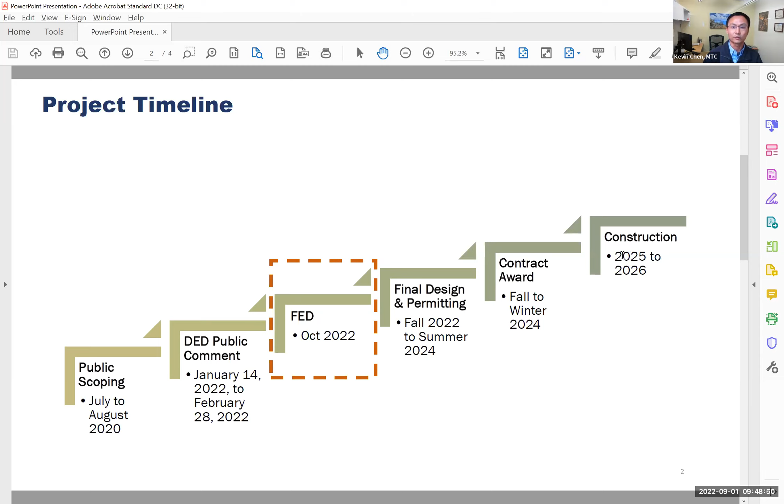Completion of the environmental document is going to be a critical milestone because it allows us to be a lot more competitive for a number of state and federal grants that we are going to be competing for. After the environmental document, hopefully we have some funding for us to proceed with the design work later this year. The plan is that we would finish design by 2024, start construction in 2025, and then finish the project in 2026. So that's the current project timeline.

Another area we've been focusing on a lot in recent months is working in collaboration with a lot of the resource agencies on opportunities we can incorporate as part of the interim project that can help provide environmental benefits and ecology enhancements. It's very time sensitive for us to provide these improvements and not just wait for the long-term project. That's why we're having this discussion right now, and the intent is to incorporate this into the interim project so we can start getting some environmental benefits as soon as possible.

One of these areas, as we've talked about before, is the Tolay Creek Bridge. As it exists today, it's a very narrow bridge, and we've heard from the environmental communities the importance of replacing the existing bridge with a much wider or longer bridge that can provide the necessary channel width to help enable a significant amount of planned restoration effort as part of the Sonoma Creek Baylands strategy.

The way you can think of it is replacement of the bridge is part of the equation, and the environmental community and Baylands group doing the restoration is the other part. We need both things to materialize the environmental benefits. So the ask for us is to incorporate the Tolay Creek Bridge replacement as part of the interim project.

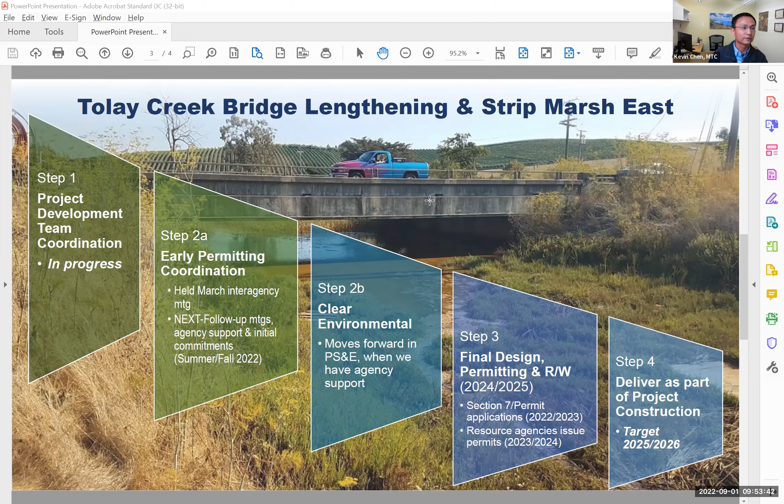We've heard many times, and our earlier speakers have spoken to it, the importance of providing bus transit on this corridor, so that's going to be implemented as part of the interim project.

Tolling is still going to be a very critical piece, as with the tolling authority it provides us the opportunity to finance against future toll funds. Rebecca Long from MTC is going to provide an update on the tolling discussion.

I'd also like to mention that back in May, we submitted a grant to the US DOT for $100 million on this project.

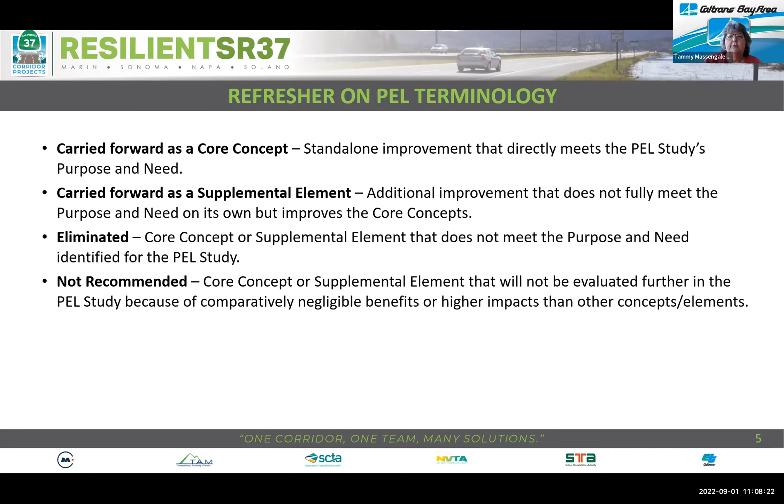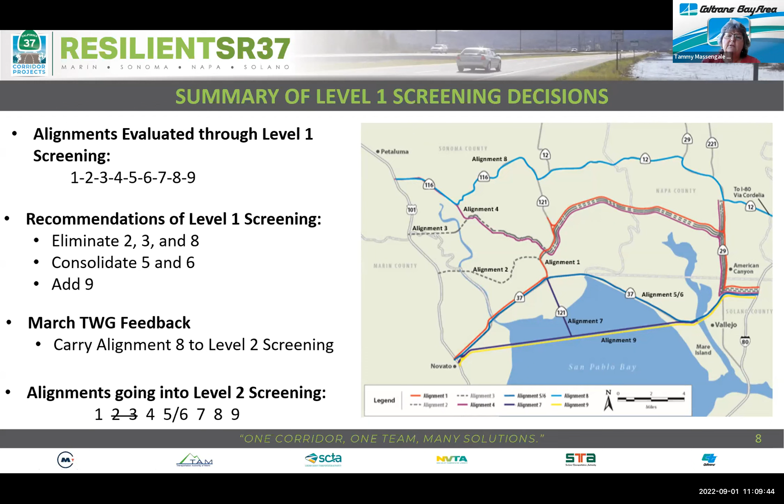Based on feedback from the technical working groups, we were asked to carry alignment 8 through and look at it further because it was completely out of the bay. So we listened to our technical working group and kept 8 in. I want to remind everybody this was purpose and need, and we felt like 8 didn't meet the purpose and need, but we wanted to do a full analysis of that particular alignment.

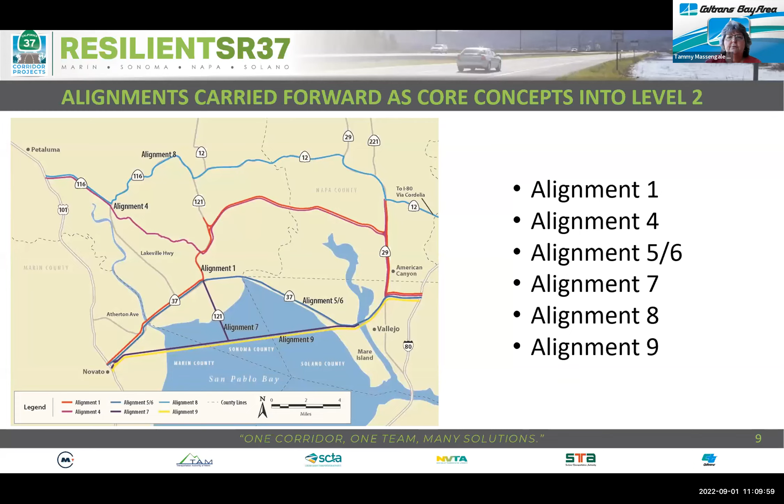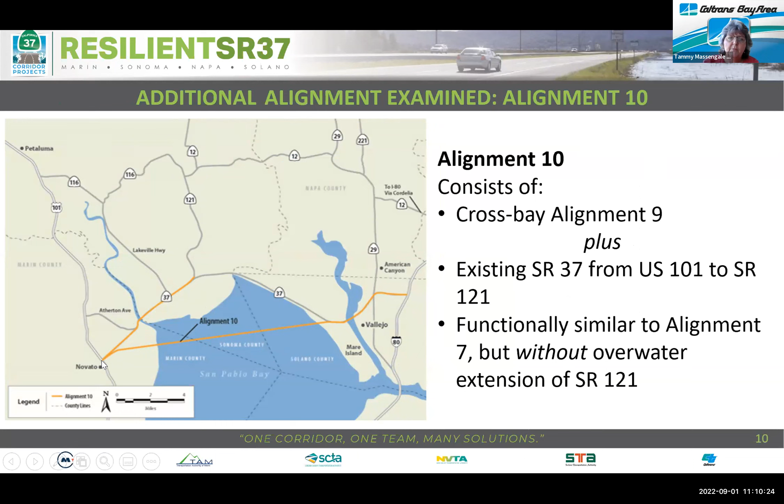So we moved into level 2. You can see here the alignments we were looking at. As we talked with our stakeholders, there was concern that alignment 9, which went straight across, would be cutting off the Sonoma Valley and folks from Napa who come over to the west. So we came up with alignment 10, which follows the same alignment as 9, but keeps this portion of the existing 37 corridor from Novato to 121. It's similar to 7, but doesn't have the extension that would create an interchange over the water.

In level 2, we had a lot of discussion about vehicle miles traveled, the new traffic analysis the department uses for CEQA - not just the department, the entire state of California. We came up with three alternatives that did not have an impact on VMT: along the existing corridor with 5, 6, 8, and 9. I know that seems difficult with 8 to understand why, and I don't have time to go into all the technical analysis. Please trust me on this, but it has to do with the calculator that's used, and it's just the pure addition of lane miles.

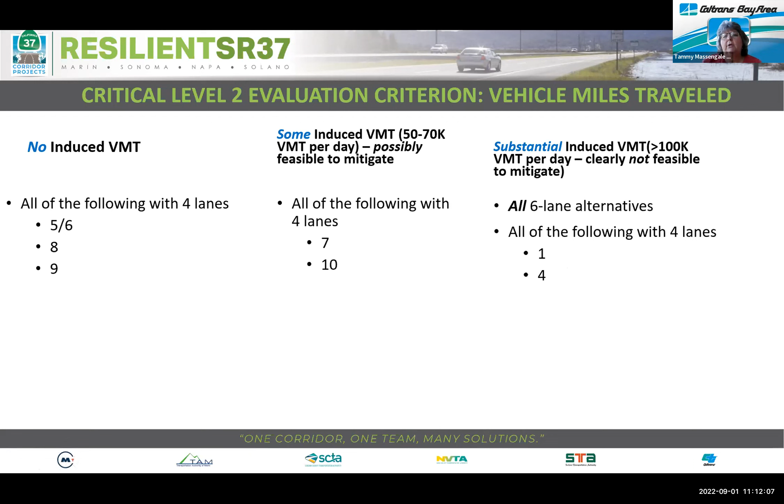There would be some increase in VMT for alignment 7 and 10, but we felt like those impacts could be mitigated to zero, which would be less than significant. Then we had two alignments, 1 and 4, that had a substantial increase in VMT which we probably couldn't mitigate. And we were looking at 6-lane alternatives, and they were a no-go when it came to VMT also, because it was too much.

So coming out of level 2, we recommended not moving forward with the 6-lane options, alternatives 1 and 4, and alternative 7. The reason we chose to remove alignment 7 was because of the interchange that would have to be built over the water - it just really wasn't feasible. Alternative 10 provided that access to the Sonoma Valley.

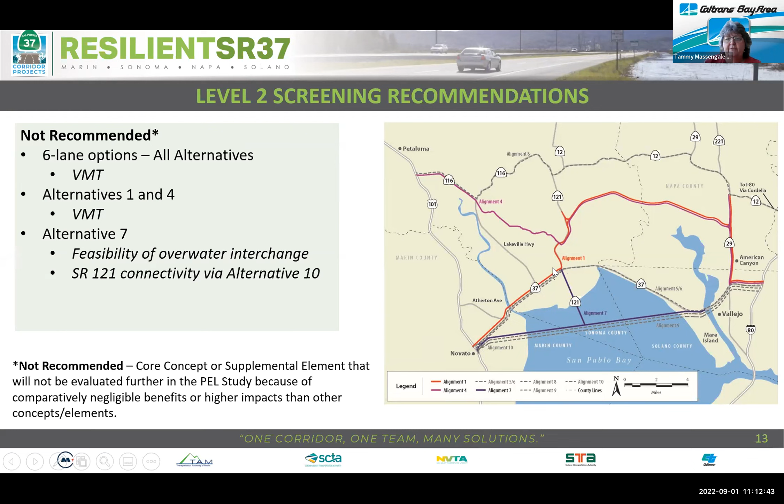As part of our second level, we also made the decision that we would only be moving forward with a causeway for all of our alternatives except for 8, which would have partial small amounts of causeway, but most of it would be just regular roadway on the ground. So we eliminated the 6-lane option, if you will, and we're just keeping alternative 5.

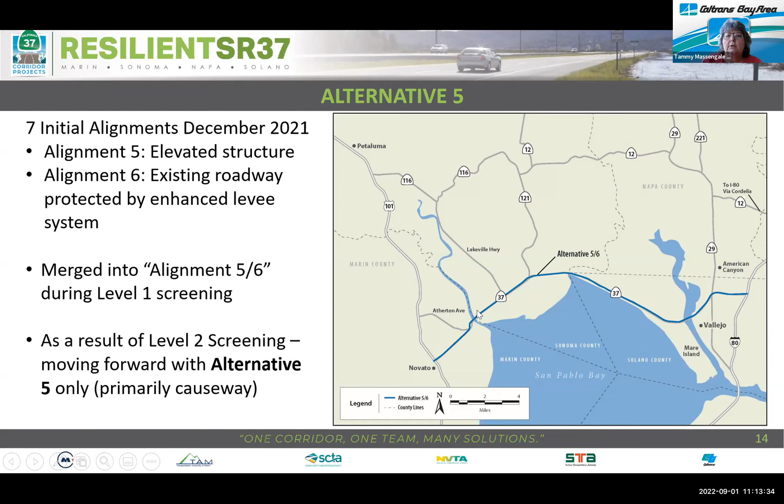Let me go back real quick. I wanted to address this primarily causeway. Some of the proposed ultimate will not be on causeway, and that's because it will be at grade. There wouldn't be any large earthen embankments or anything like that.

Moving into level 3, we went forward with alternatives 5, which is on the existing corridor, 8, which is up here on the far northern, and then 9 and 10, which were across the bay. We also looked at other modal options, including bike and pedestrian, rail, and a shoulder running lane for express buses and/or carpools. For rail, we've been working closely with SMART and their staff, and we are moving forward that we don't want to do anything that precludes rail from their future build out.

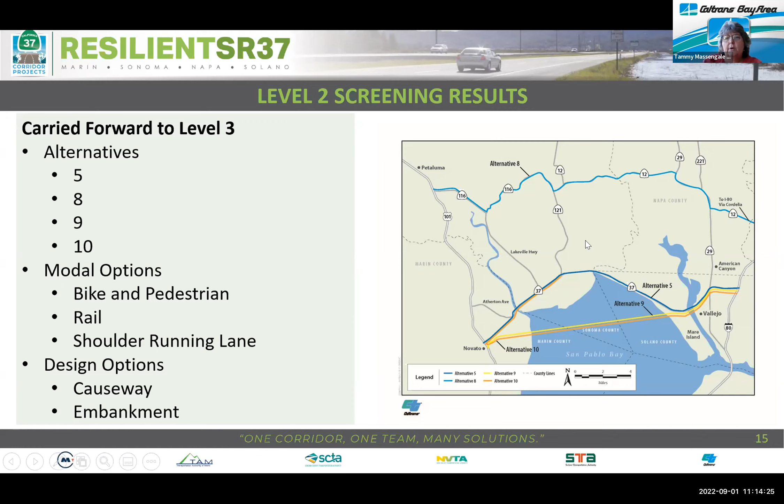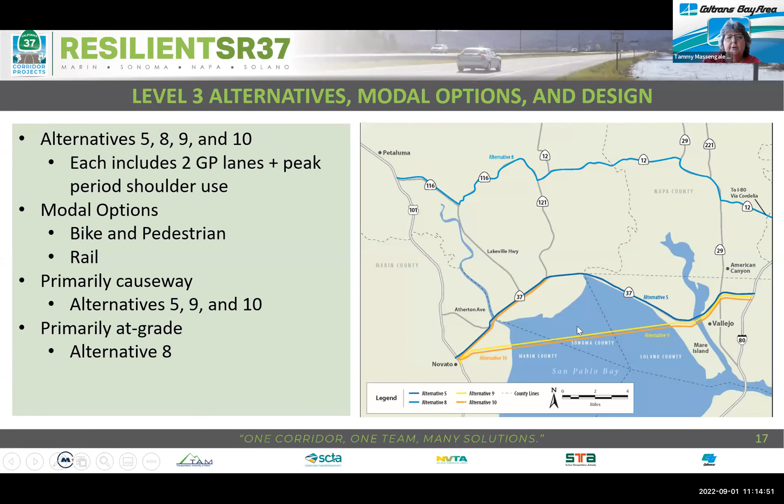The design options were the causeway and the embankments. Coming out of level 3, we had these alternatives that were going to have 2 general purpose lanes and that peak period shoulder lane. They would have bike and pedestrian and would be able to have rail run adjacent if that's the choice that SMART makes. And I talked about that it would be primarily causeway and at grade up on alternative 8.

When we went through and did the analysis for level 3, we used the Plan Bay Area Model 2050. We had several other criteria that we used, but we don't have time today, so I'm just going to highlight some of them that were differentiating factors.

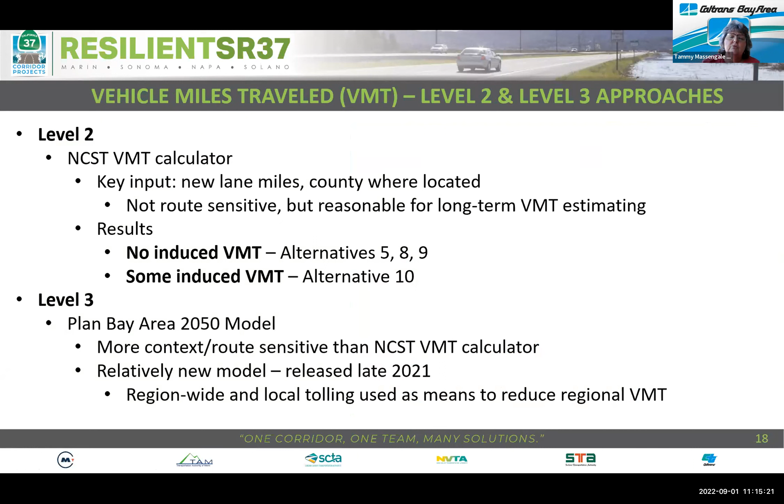The model we used from Plan Bay Area 2050 is new, it hadn't really been used for this. There's not going to be any real changes to VMT compared to level 2 because of the way the 2050 model has been developed. So what we really wanted to focus on here was the origin and destination pairs, because that's what we build our roads for, the traveling public.

As you all know, this is a very dispersed corridor. People come from all over to go places. So we looked at the top 4 OD pairs, origin destination pairs, and found that the best place would be to look at the difference in mileage, travel time, and what would happen in the peak flow periods. What we found was that alternative 8 had the most increased mileage for those 4 OD pairs.

Interestingly enough, if you were going from Vallejo over to Novato or over to San Rafael, the best route would be for people to go down and use the Richmond-San Rafael Bridge. So those folks going to Southern Marin would not be using the new highway.

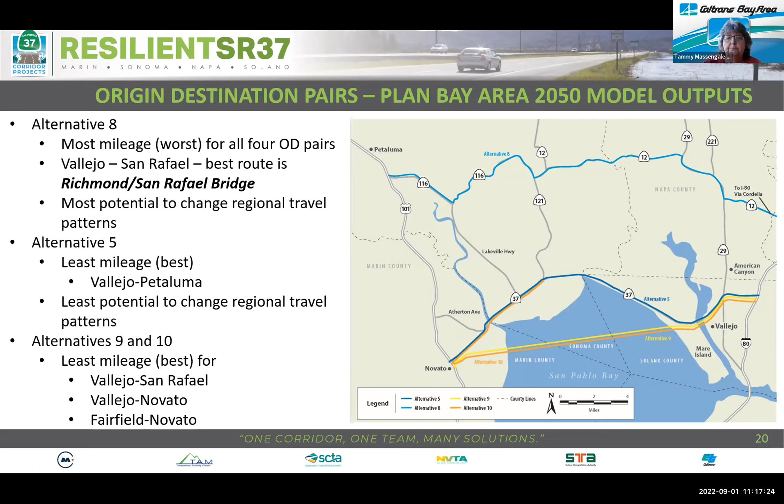What we found is that alternative 8 does not serve any of those populations. Alternative 5 would serve all of them. Alternative 9 would serve 2 of them. And alternative 10 would serve all but 1. When I say serve them, it's the existing way those EPCs get from where they live to other points along the corridor.

All of our other methodology was based on acreage impacts. We're still looking at this at a fairly high level, and we wanted to make it equitable across all the alternatives. What we found is that alternative 8 had more at-grade sections and is primarily located in uplands. Alternatives 5, 9, and 10 would be on causeways or bridges for the vast majority of their length.

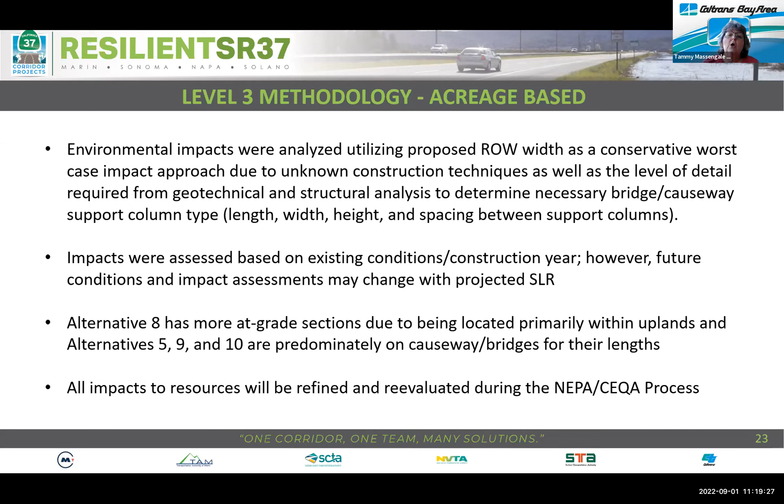It's important to note that these impacts we've identified during the PEL will be evaluated further in NEPA and CEQA. I picked out a few that I thought would be interesting and informative, and that really helped us make our decision for the recommendation.

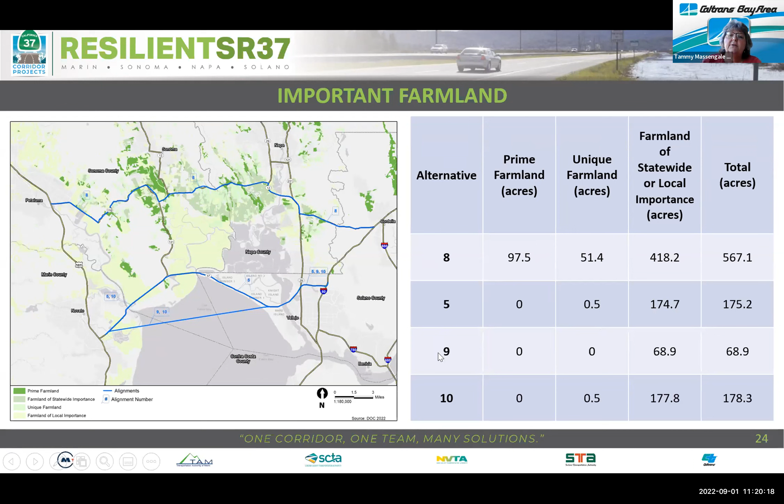Farmland is divided into different areas: prime farmland, which is very difficult if not impossible to mitigate; unique farmlands, which would include viticulture; and farmlands of statewide or local importance. Alternative 8 has significant impacts on all of those different types of farmlands.

Alternative 5 has some impacts, 9 has the least since it's going across the bay, and 10 has some. We also looked at wetlands, all types, not just one particular kind. Alternative 8 had the least impact on wetlands, alternative 5 was next greatest, then alternative 9, and then alternative 10. We wanted to see which one was going to have the worst or the best.

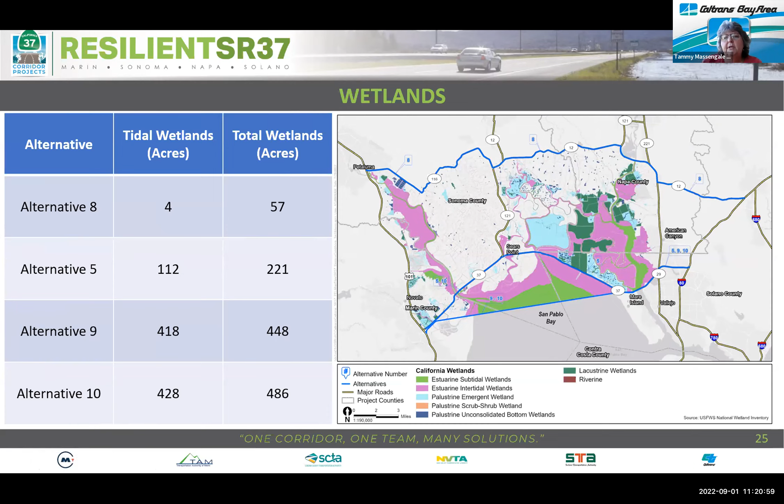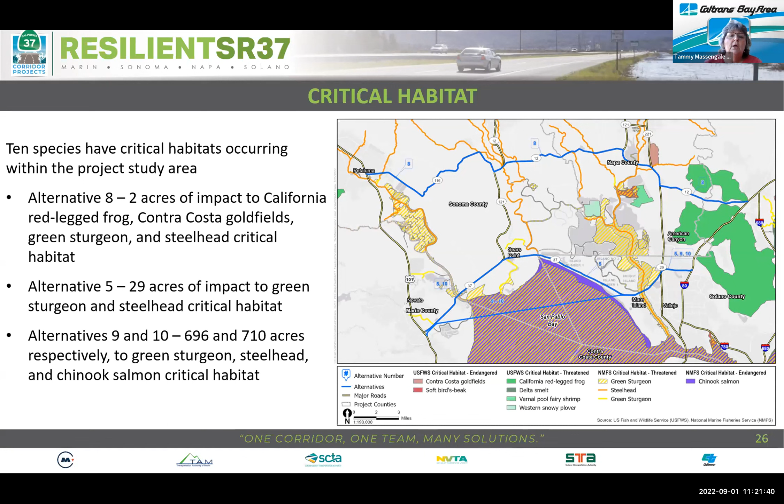You can see by looking at all these resources that it's really a balancing act. We also looked at critical habitat, where species are listed, either living there or migrating to and from. For alternative 8, there were 2 acres of impact to the red-legged frog, goldfields, green sturgeon, and steelhead critical habitat. Alternative 5 had 29 acres of impact to green sturgeon and steelhead critical habitat. Alternatives 9 and 10 had substantial impacts, 696 and 710 acres, to sturgeon, steelhead, and Chinook salmon.

Most of it is the impacts for regional travel patterns and the impacts to the equity priority communities. It's also very susceptible to wildfire closures, and there's a huge impact to prime farmland and terrestrial species. There would be noise abatement required because there are a lot of residences close to the highway, and it would have the most adverse effect on visual quality.

We did look at the purpose and need also, and it is still recommended not to move forward with alternative 8.

Alternative 5, the recommendation was to move it forward as a core element. There were a variety of reasons, but it really minimizes land conversion, maintains the existing travel patterns, and considers the resources that will be impacted. I listed some of those: the wetlands, the fish species. Those areas have already been impacted by the development that has taken place along the corridor.

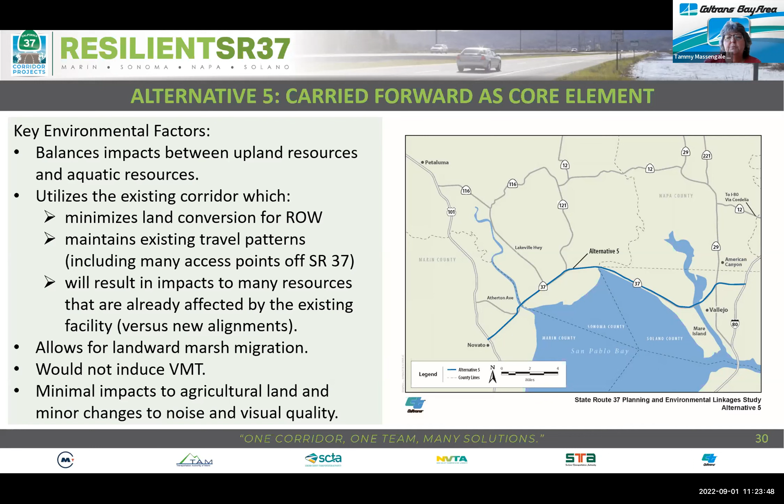So they wouldn't be as significant impacts as some of the other ones. This would also allow for landward marsh migration, which we've heard from our stakeholders is very important. It would not induce VMT, and there would be minimal ag land impacts. Most importantly, it really is a balancing act here between the impacts to both upland species and resources and aquatic species and resources. And it met our purpose and need.

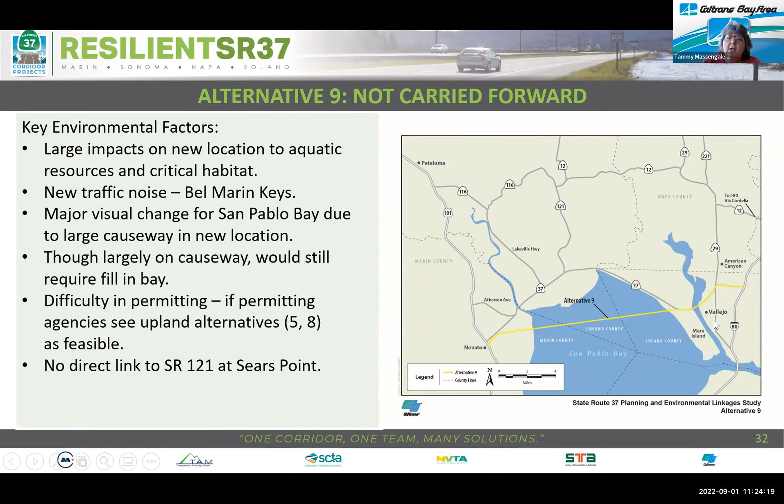Alternative 9, we are recommending it not be carried forward because of the huge impacts to aquatic resources and critical habitat. This area here is land that has not been impacted by development, so there would be very significant impacts. It would cause new traffic noise to the community of Bel Marin Keys over here.

There would be a big visual change for the San Pablo Bay. Instead of people looking out and looking at the water, there would be a very large structure there. We have heard from our resource agencies that it would be very challenging to permit this project. BCDC was very clear with us on that. And then it would eliminate any connection to Sears Point. We've gone through and talked about how it compares to the purpose and need here.

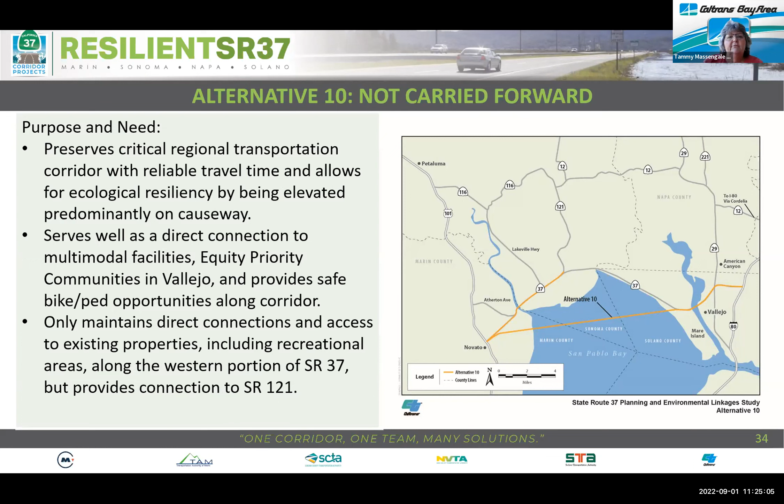Alternative 10, we're recommending that not be carried forward. The reason, I'm sorry, I had these backwards, is that it would have the most impacts to aquatic resources and critical habitat. It would require fill within the bay, which will not meet BCDC's requirements.

It would cause additional travel for folks going to Sears Point, which we know is a large recreation area. There would be increased traffic noise at Bel Marin Keys and that visual change that I talked about.

We looked at it compared to the purpose and need, which you have in your slides. So the PEL study is recommending that when the project moves into PA&ED, the ultimate project will be along the existing alignment. We're recommending an expressway design with 2 travel lanes in each direction with a peak period shoulder running lane. The posted speed limit would be 60, with a design limit of 70. There would be accommodations for bikes and peds along the corridor.

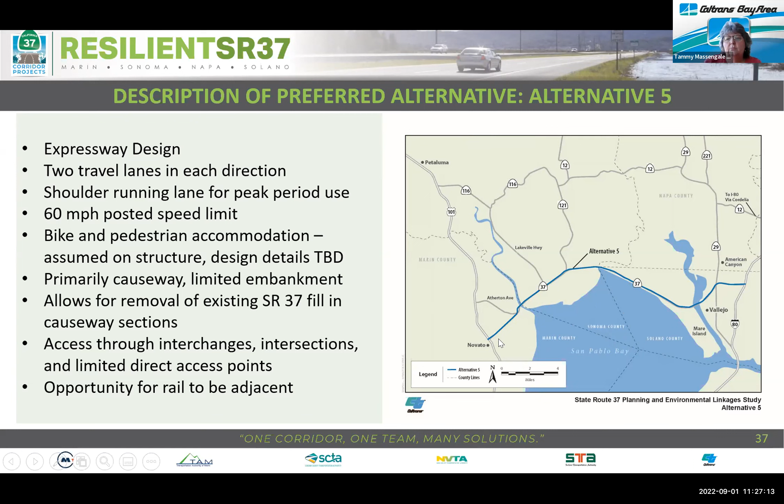We're still listening to stakeholders to see if the bike and ped access would be right on the facility or on a cantilever, so it would be more of an enjoyable experience. There would be access through interchanges, and also some access points that would be challenging for us, so we're still working through that. This would provide the opportunity for SMART, if they so chose, to be adjacent to us, and for sure on the western portion they would be able to remain adjacent to the corridor.

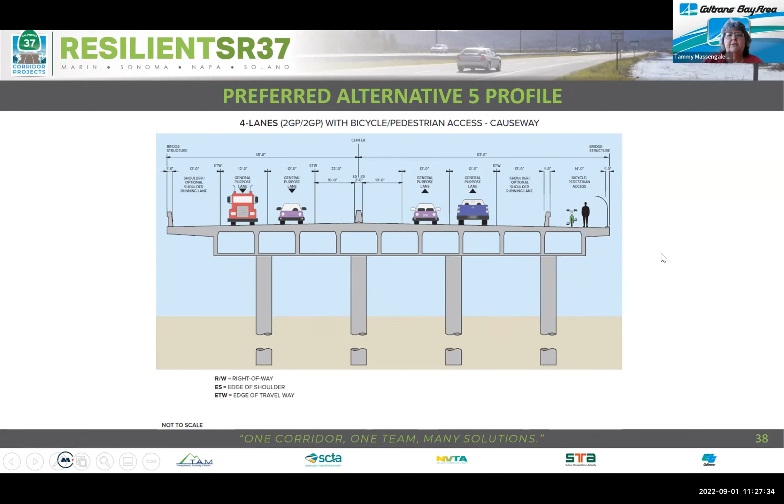This is the profile we are working with. You can see we have our 2 travel lanes, the peak period shoulder running lane, and on one side we would have the pedestrian and bicycle access.

So what are we going to do next? Barbara asked this question, so I'm glad she did. Thank you for that.

There's some work that still needs to be done. We're not ready to do an environmental document on this, but all of this work that has been done by the team will move in and help expedite the environmental process. There's work still needed in the PEL, and those areas we're going to continue to look at.

How are we going to place the causeway - north of the existing alignment, south, or a mixture? Where are those locations for interchanges going to be, and how are we going to design them? What access points do we have to keep? And then the bicycle and pedestrian lanes. Tolling and funding is the billion dollar question, because this is a very expensive proposition.

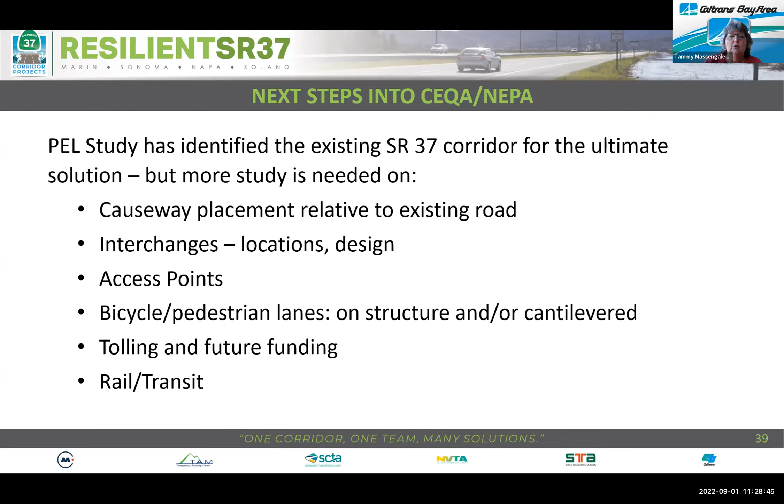We will continue to work with SMART on how they envision aligning with the corridor. Our next steps: we will finish up with a stakeholder working group meeting - our technical working group meeting is next week, where we'll dive into some of those details I just mentioned that we still need to work on. And the public meeting will be September 14th.

Oh, it's down here, I forgot my stakeholder working group. Sorry, I'm trying to hurry and I'm losing my train of thought, so I apologize for that.

We will have our last stakeholder working group on September 30th, and then the PEL study will be produced. Part of the PEL study that I think will be of particular interest to you all is our implementation plan and how we see future projects coming out of this PEL and building that ultimate project. I know I went super fast through that, but I'm able to answer any questions you may have.